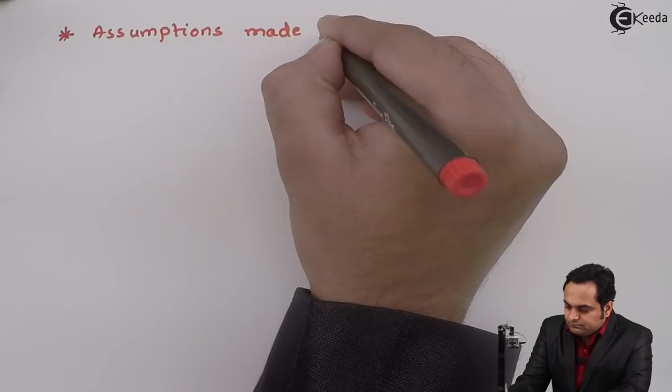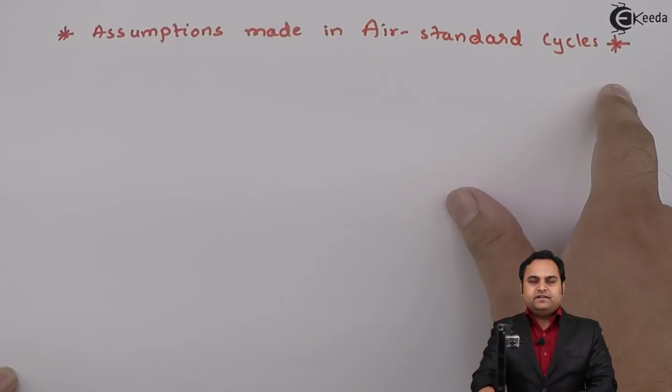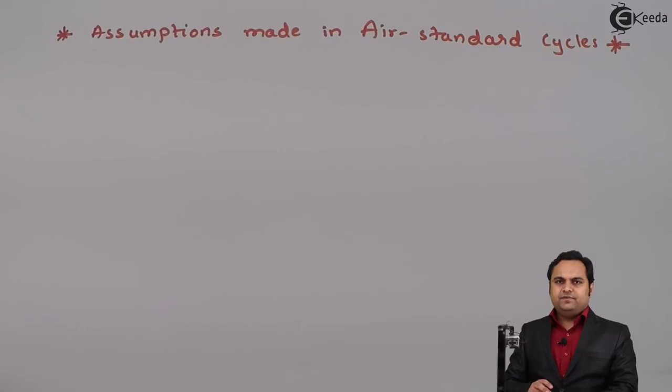Here, as I have written, these are the assumptions made in air standard cycle. Before deriving some of the cycles for IC engines, we have to make some assumptions. It is called air standard cycle because air is used as a working fluid. So the first point: assumptions made in air standard cycle.

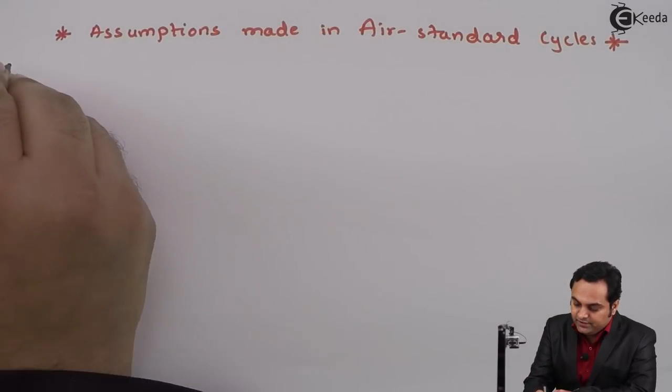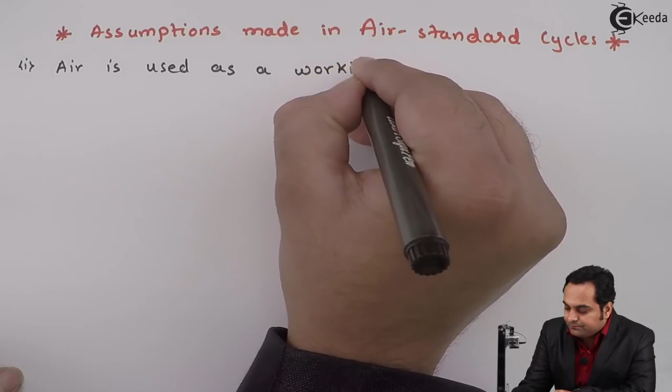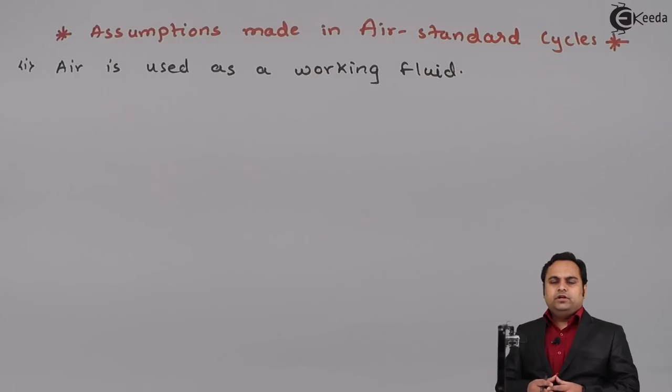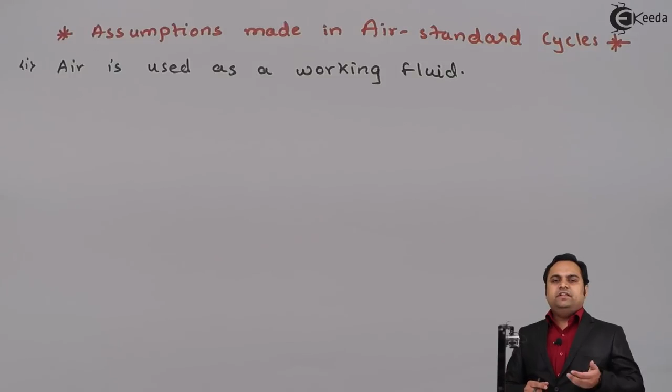The first point is air is used as a working fluid. In case of engines, there will be a mixture of air and fuel inside the engine, but here in air standard cycles, our assumption is only air is present inside the engine. This is because if we compare the quantity of air and fuel inside the engine, there is more air compared to fuel. So air is used as a working fluid in air standard cycles.

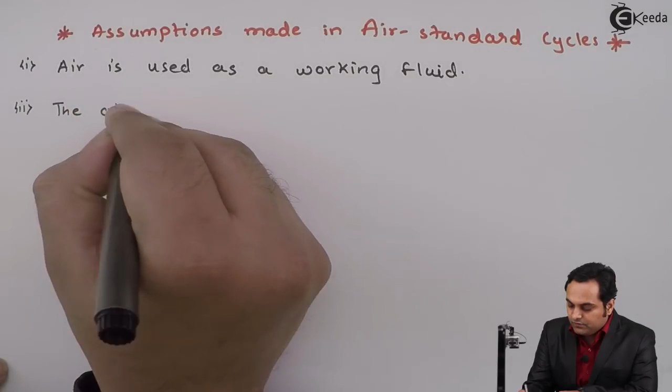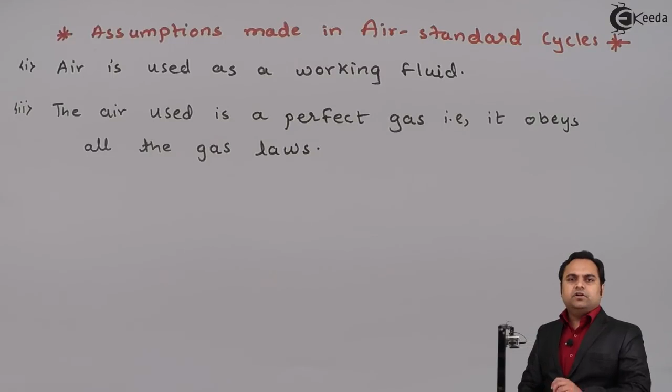Next, the air used is a perfect gas, that is, it obeys all the gas laws. So the air we are using for air standard cycles should be a perfect gas, meaning it should follow all the gas laws to be called a perfect gas.

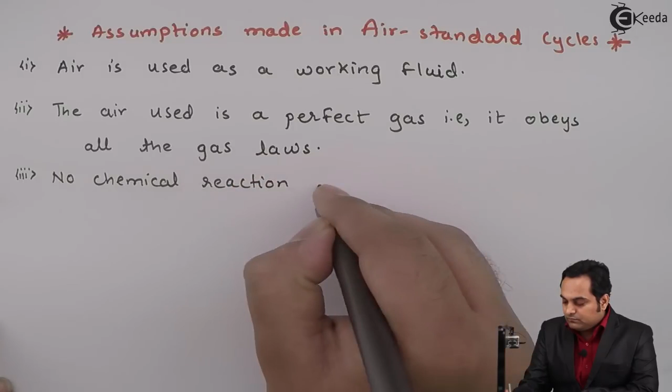Next, the third point is no chemical reaction takes place. That is, the chemical composition of air does not change, it is constant throughout the processes.

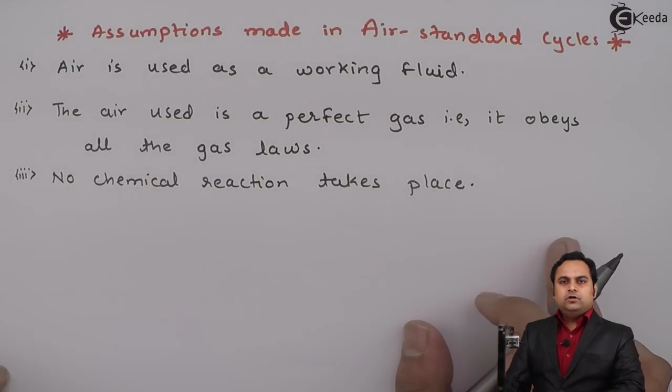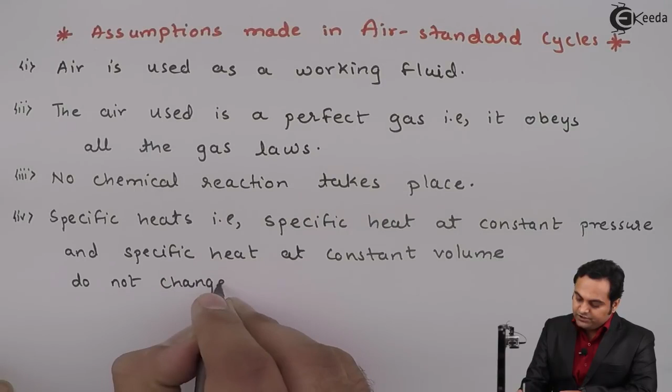Then we have specific heats, that is specific heat at constant pressure and specific heat at constant volume, do not change with respect to temperature. As we know, a perfect gas like air will have two specific heat values, and the assumption is that with increase or decrease in temperature, there is no change in the specific heat values. Specific heat will remain constant throughout.

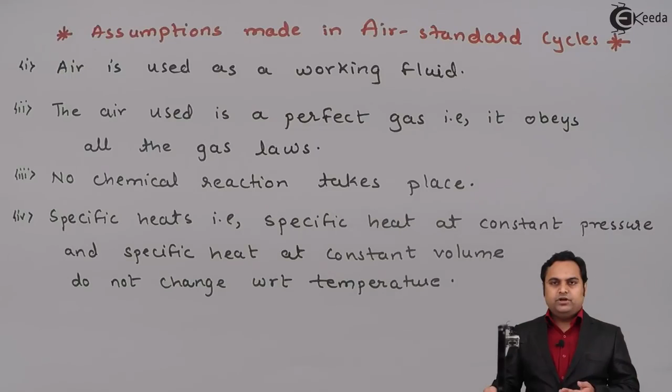But in actual practice, as temperature increases, there is a change in the specific heat. So this is an assumption, because before deriving the formula for various air standard cycles, we need to assume some points. These are the points we are assuming.

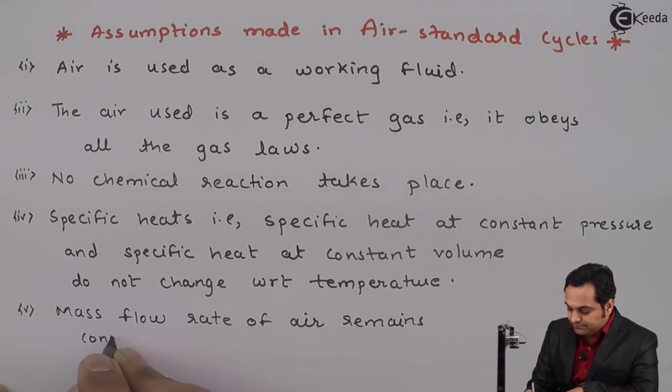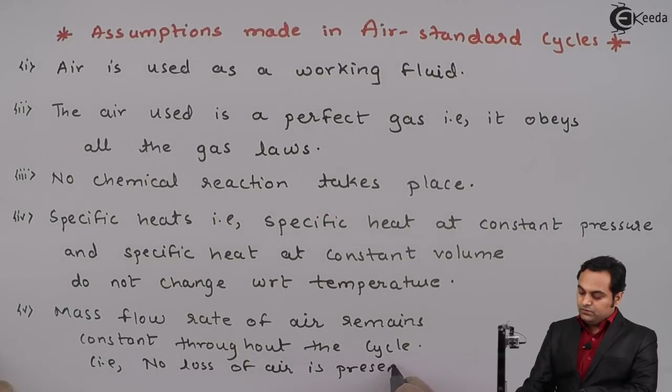Next, the mass flow rate of air remains constant throughout the cycle, that is, no loss of air is present. It means that when a certain amount of air is brought into the engine cylinder, that quantity of air remains the same throughout until the process is completed. There is no loss of air - the air inside the engine won't leak outside.

That is the assumption. But in actual engines, there are chances of air leaking out through the valves. So here we have seen various kinds of assumptions made in case of air standard cycles.

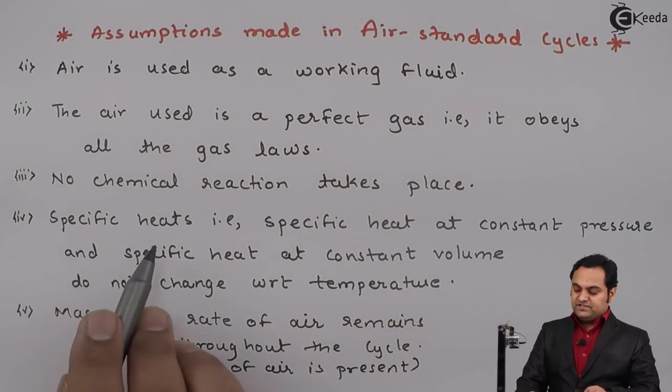Because here we are using air as a working fluid, and the air used is a perfect gas, that is it obeys all the gas laws. No chemical reaction takes place. Specific heat at constant pressure and specific heat at constant volume won't change with respect to temperature. And lastly, the mass flow rate of air remains constant throughout the cycle, that is no loss of air is present.

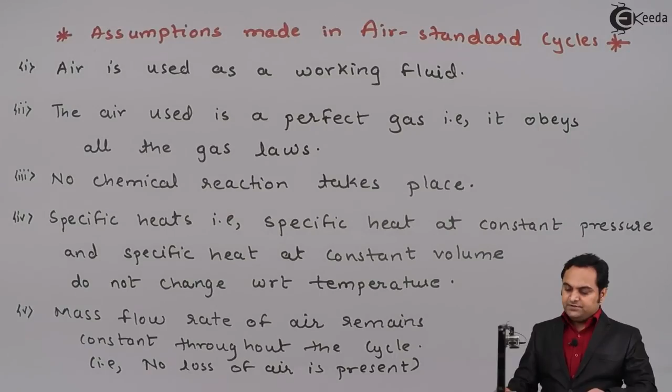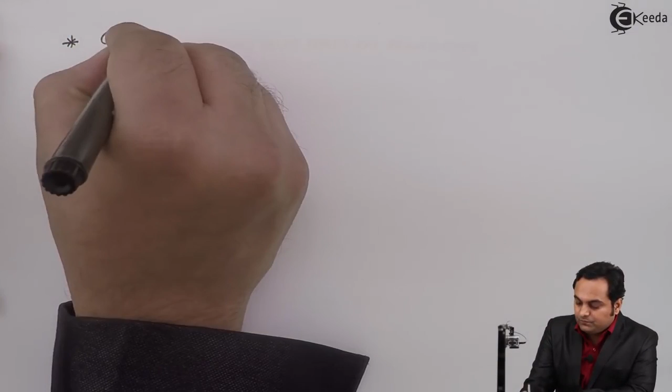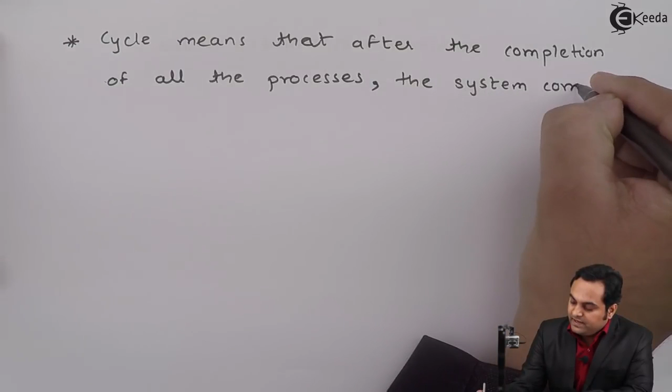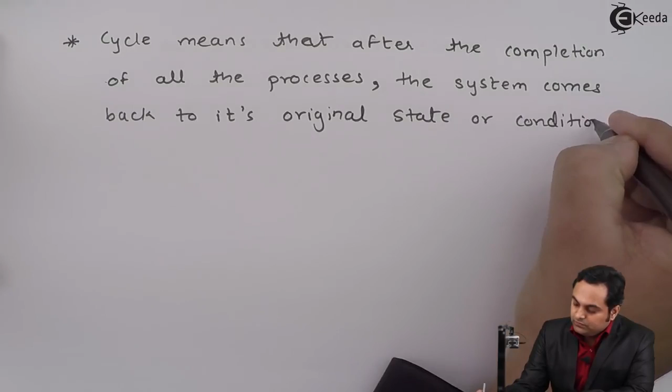Then by the term cycle, we can say that after the completion of all the processes, the system comes back to its original state or condition. That is, by the word cycle we mean that when all the processes are completed, the system returns back to its original state, where it had started.

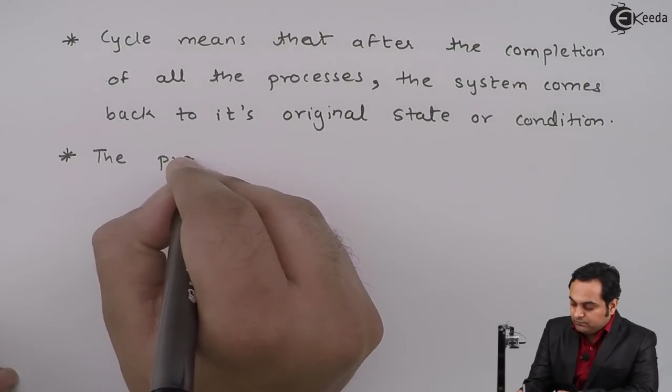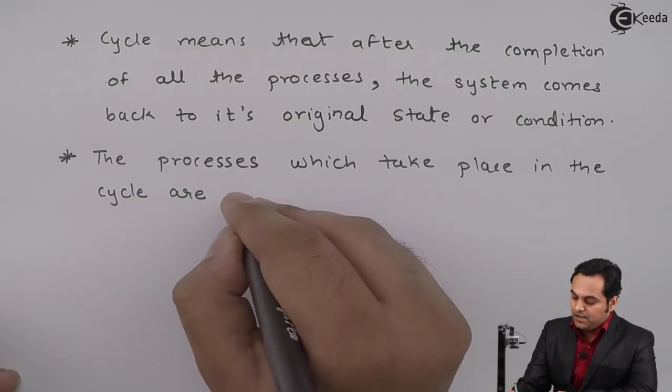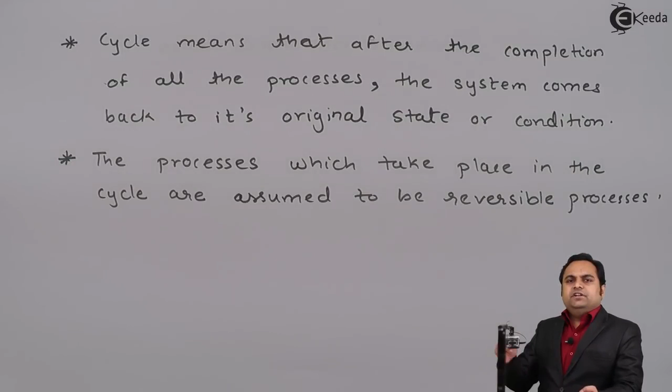And the processes which take place in the cycle are assumed to be reversible processes. That is, the processes used in air standard cycles are reversible - they return back to their original condition without change in their properties.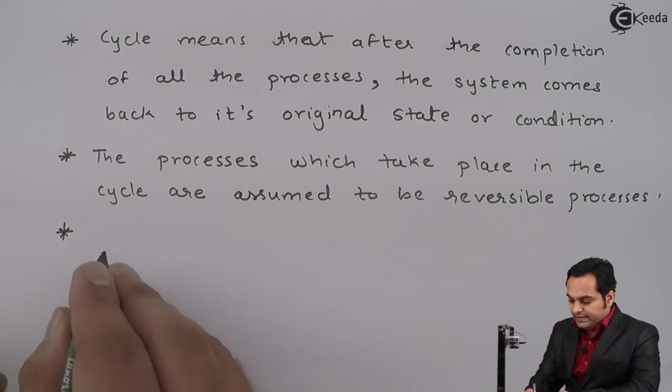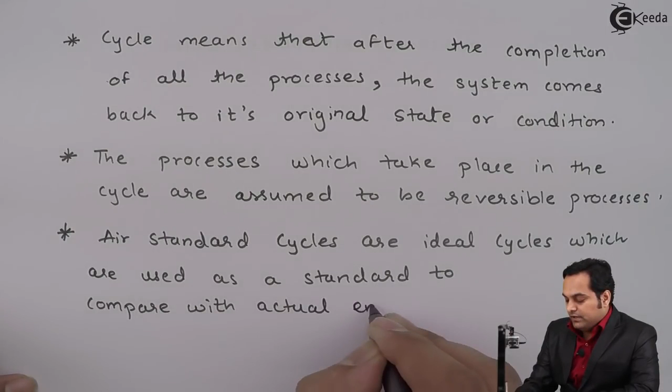And here we can say that air standard cycles are ideal cycles which are used as a standard to compare with actual engines. So air standard cycles are ideal cycles, a standard used to compare with actual engines, to check the performance of actual engines.

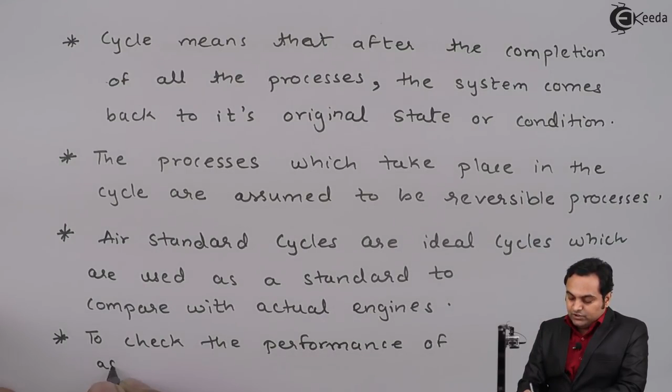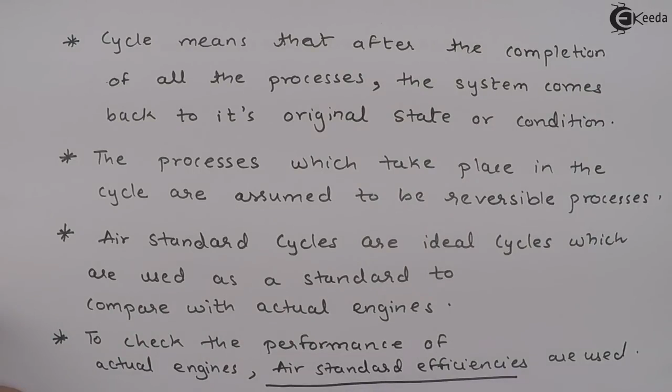Air standard efficiency is used - if we want to compare the performance of an actual engine with respect to the theoretical engine, we would use the air standard efficiencies. So in this video, we have seen the assumptions made in air standard cycles.